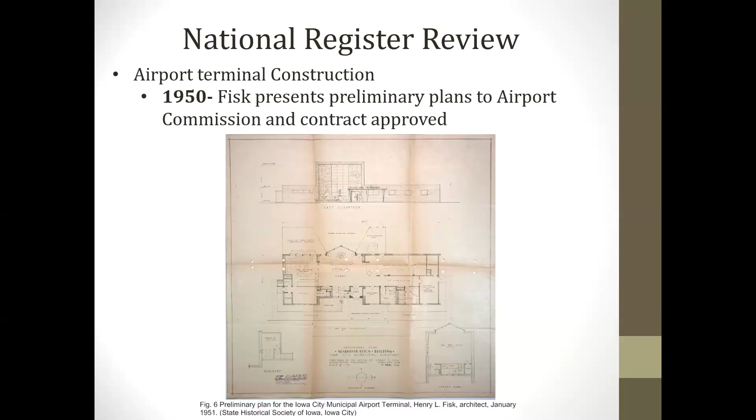I don't know that she went into the call for architects or how that all started, but in 1950, Henry Fisk submitted preliminary plans and a contract was approved.

Through some airport bonds—I can't remember who purchased them, but it was like a large company or something—and a grant from the CAA, the terminal was funded.

Then they started having a lot of delays. If you can imagine, after World War II, there were some restrictions on materials. You couldn't necessarily use all the steel you might want to use, partly because of shortages, and also because there had been shortages—they were starting to stockpile and restrict uses of materials.

So there were some delays, specifically because of the use of metals. Fisk had somewhat anticipated this and had designed the building to use a minimal amount of steel, which was good because that helped make it so that it could be approved, as it had a lower use of steel than other buildings of that size.

Some of the shortages continued along with weather delays in '52, and finally the building was completed in 1953.

Some key aspects of the terminal design were that entry canopy for loading and unloading vehicles, and the west windows over the airfield were tinted to limit the glare of the sun. The floor was radiant heated concrete originally, with air conditioning and modern asphalt tile flooring, and some modernistic light fixtures.

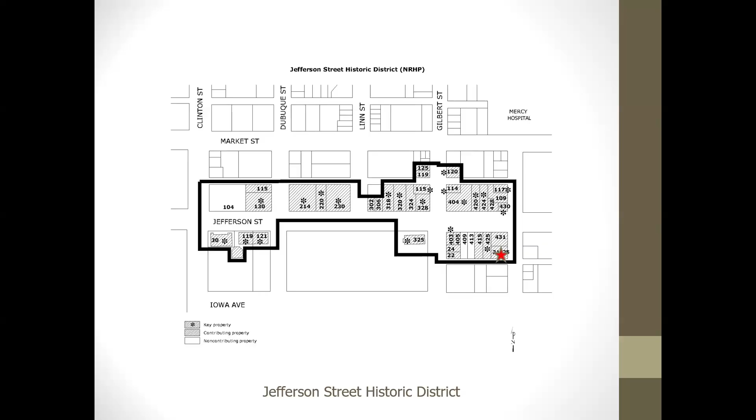The home is covered in metal siding, and this property has succumbed to significant deferred maintenance over the years. However, it was recently sold, and the new owner is looking to make substantial improvements. Recently, the staff and chair approved a repair of the northern foundation wall, which was caving in.

Today's request is to replace the metal roof with architectural asphalt shingles. The lower sloped roofs will be replaced with membrane roofing. There are internal gutters that will need to be removed due to deterioration, however the internal gutters on the front porch will be repaired. The project also includes replacement and repair of trim and trim details due to deterioration.

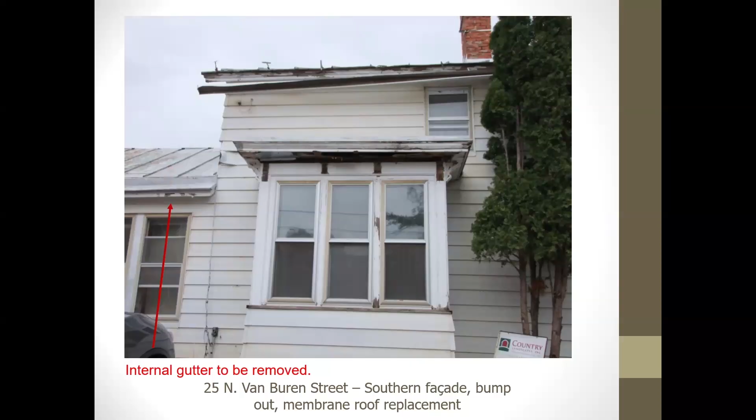This is an internal gutter that would be removed as part of the re-roofing project, and here's another photo of that kind of metal roof on the rear addition. This is the front porch. Again, the front porch internal gutters would remain.

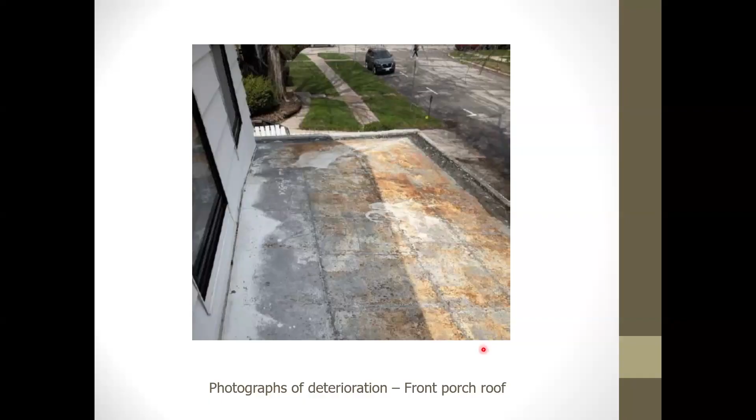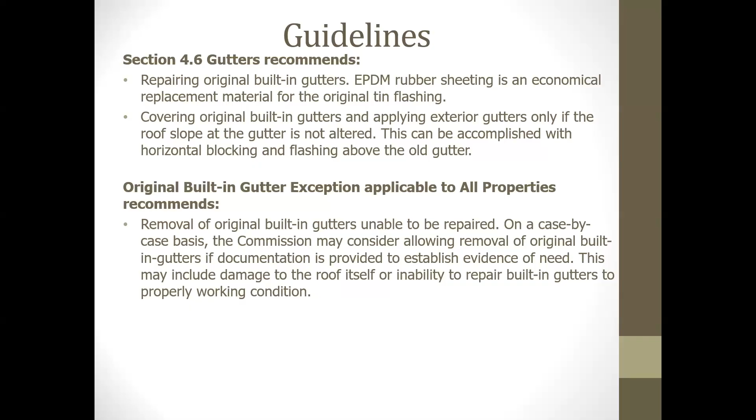In terms of the guidelines, our guidelines recommend repairing original built-in gutters, covering original built-in gutters, and applying exterior gutters only if the roof slope is not altered. Also, original built-in gutters can be removed if they are unable to be repaired, and this can be approved by the commission on a case-by-case basis.

In terms of mass and roof lines, historic trim should be preserved whenever possible. In this case, a lot of it is gone or significantly deteriorated, so it would need to be replaced. The guidelines also recommend maintaining metal roofs where possible, but with this home it's just too deteriorated to repair, so the recommendation is to replace, and again that can be done by the commission on a case-by-case basis.

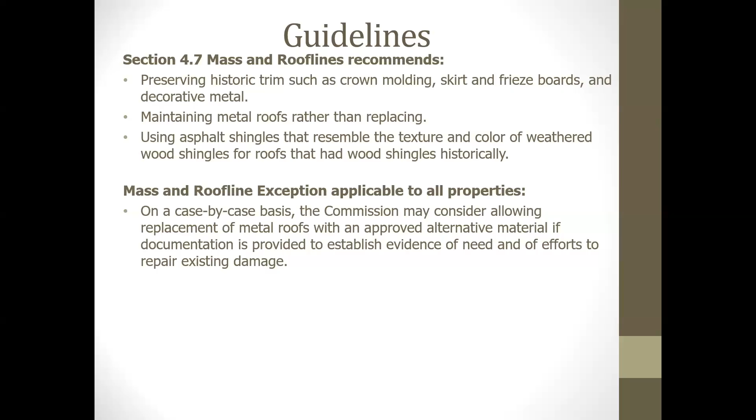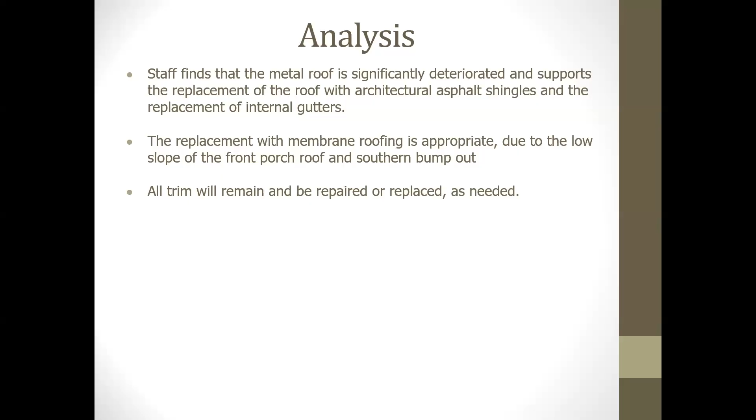Staff finds that the metal roof is significantly deteriorated and supports replacement of the roof with architectural asphalt shingles and replacement of internal gutters. The replacement of membrane roofing on those low-sloped areas is appropriate, and all the trim would be repaired, replaced, or remain as needed, matching what was there originally.

Staff recommends approval of a certificate of appropriateness for the project at 25 North Van Buren Street, allowing replacement of the deteriorated metal roof, including the internal gutters, with architectural asphalt shingles, and replacement of the metal roof on the front porch and southern bump-out with membrane roofing. Again, the internal gutters on the front porch roof would be repaired, and all trim would either be repaired or replaced as needed with wood to match the existing.

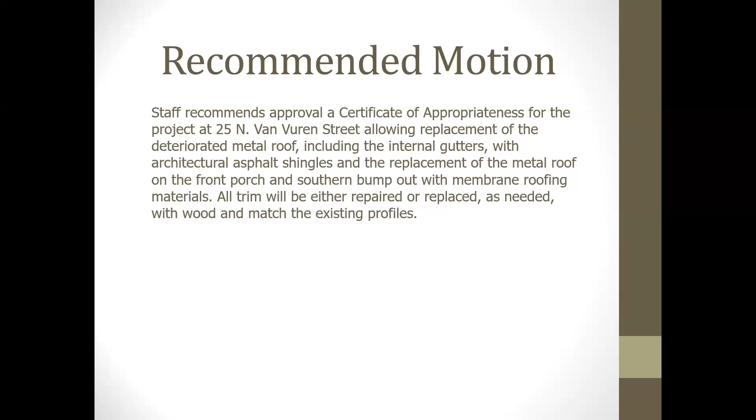That's all I have. Thank you.

Sounds good. Are there any questions for staff? Did we have somebody go out and look at the metal roofs then? Yeah, Jessica and I both did. Okay, and the architect is here as well. Do we have commentary from the owner? That's the next step, I think, right? Yeah, or the architect or anybody, if you want to comment or if we have questions for you, but you don't have to if you don't want to. You just have to come up and sign in.

I am Justin Straight, the general contractor and project manager. One note to what you said: the south bay window, the internal gutters on that will also be able to be salvaged. The curb gutter, the Yankee style, however, best referred to on the south face, is in seriously bad shape, and it's such that the way it's built and formed would require a crazy amount of work. The way the gutter actually discharges, it goes out the eave on the backside of the house, so it'd be on the west side, right above the exterior wall. Where it's placed and its current state is one of the reasons we wanted to just go ahead and get rid of it, and also due to the extensive amount of other work that's going to be done.

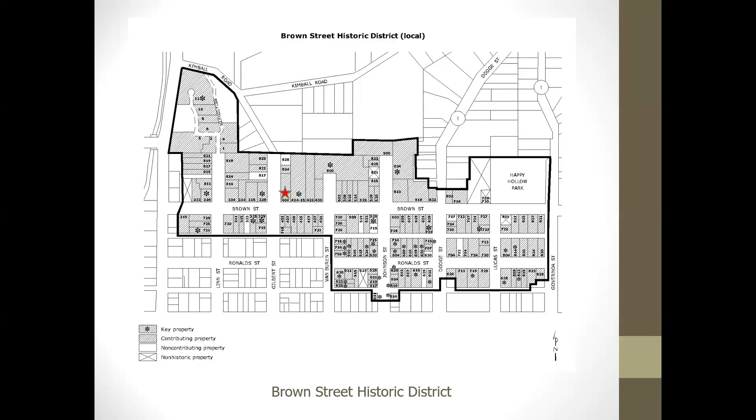This next project is for the property at 404 Brown, which is a contributing property in the Brown Street Historic District, shown here with the star on the map. This home was built in 1916. It's an American four-square. In 2018, the commission approved an attached garage for this property, however that project never moved forward—the previous owner never ended up constructing it. Today there are new owners who would also like a garage and have proposed something slightly different than what the commission approved in 2018, so it's coming back for your review.

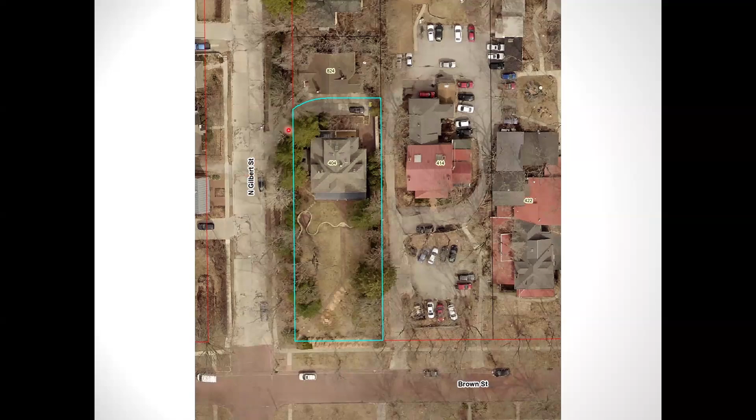Here's an aerial view of the property. You can see that the home has a substantial front setback from Brown Street, leaving very little room in the rear yard for a garage, so a detached garage for this property is difficult. The project originally approved was unusual in that access to the garage was through the neighbor's property at 414. That easement hadn't been secured at the time, but the idea was they would eventually get an access easement from the neighbor and enter the garage from the east side. The proposal now is to have an easier entrance off of North Gilbert Street.

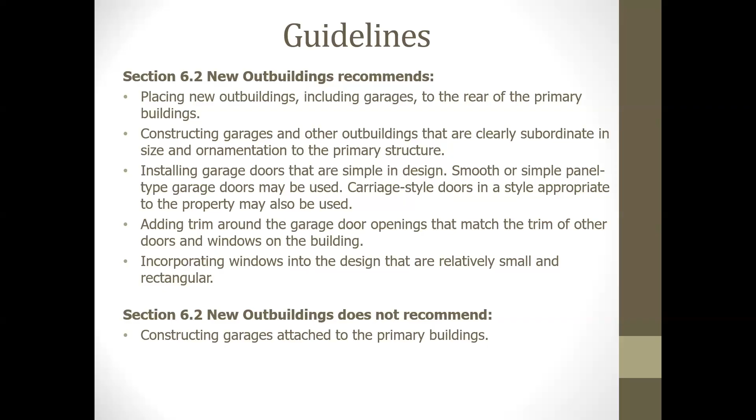The guidelines for new outbuildings recommend placing new outbuildings at the rear, constructing garages that are subordinate to the primary structure, installing garage doors that are simple in design, though carriage-style doors are also allowed and may be appropriate. They also recommend adding trim around garage door openings to match the trim of other doors and windows, and incorporating windows that are relatively small and rectangular. The guidelines do not recommend constructing garages attached to primary buildings.

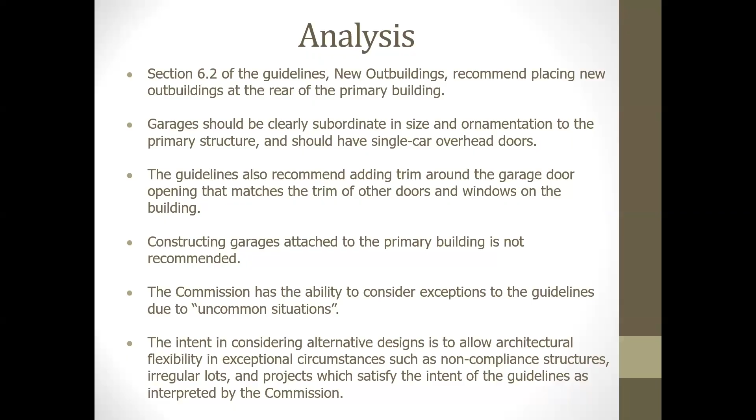In our analysis, staff finds that the majority of these guidelines are met. However, the proposal is to have an attached garage, which is not recommended by the guidelines. The commission has the ability to consider an exception to the guidelines due to uncommon situations. The intent in considering alternative designs is to allow architectural flexibility in exceptional circumstances, such as non-compliant structures, irregular lots, and projects which satisfy the intent of the guidelines as interpreted by the commission.

Staff finds that the property presents a unique condition that justifies an exception to the guidelines to allow an attached garage, mainly due to the very large front setback and not having any room in the rear to build a detached garage. The exception is warranted due to the unique configuration of the home on the lot, and the proposed addition does not significantly affect the architectural character of the historic home. Staff recommends approval of the certificate of appropriateness for the project at 404 Brown Street as presented in the staff report, through an exception to the guidelines allowing an attached garage due to the placement of the home on the lot. Are there any questions for staff?

Can you go back, not the drawing of the garage, but when you were showing... yes, this one. I'm curious because my understanding is with additions we set them in so you can't see them, but this one clearly bumps out. What's the reason? Is it just because it's a garage and you can't see it at all from the front because of such a huge setback? Why an exception for this?

They are maintaining that original corner, which we worked with them on. Bringing it completely in makes the garage almost non-functional, and because of the distance from Brown as well. All right, just curious—I think this is a great idea, not questioning it, just really curious.

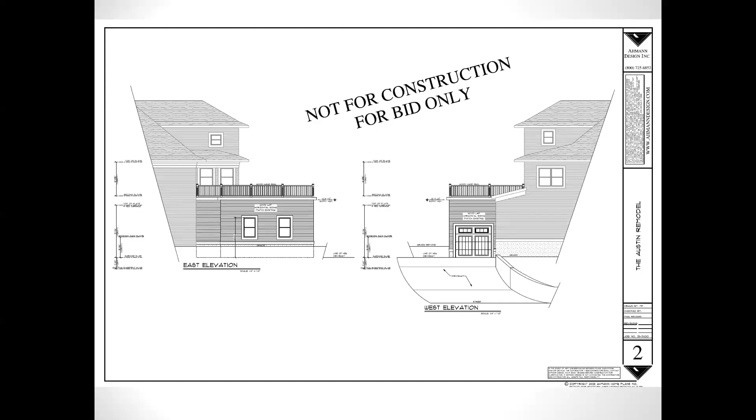Yeah, I have a question as well, this is Lewis speaking. If you go back a couple more—I don't know which one it is—this one, nope, keep going, this one. A lot of times we're worried about lines, like where windows are and where the foundation is, and these don't seem to match. I don't know if this is just the drawing or if this is a plan, or if that's something we don't care about right now.

Are you talking about this area here not matching here? Yeah. I think the topography of this site is really challenging. Sure, and I think that's part of the reason you see that difference, but it is a difference—it will be different.

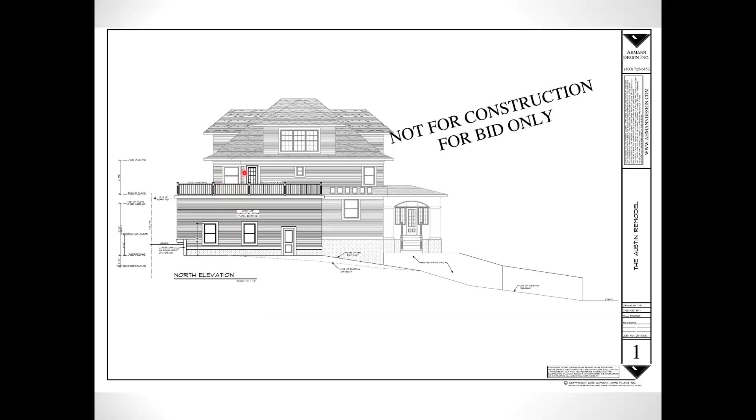For general background information, I know this house—it's beautiful. It does have that huge front yard. We would never consider putting something out in front of the house because that would take away from the dominance of the house. Is that correct? Yes, how I understand it.

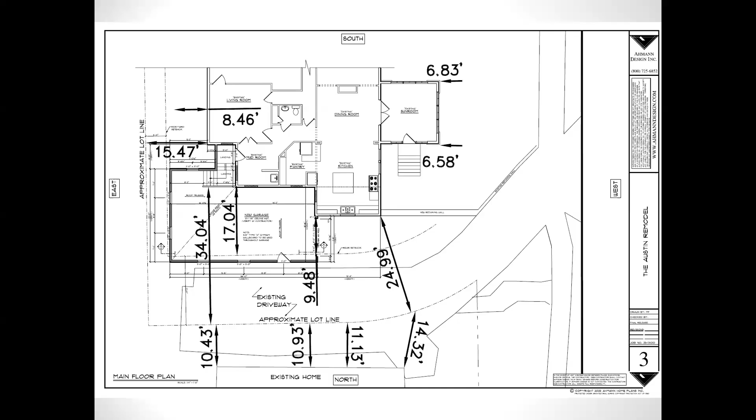Any other questions for staff? Okay, if the owners would like to speak, you don't have to, but if you'd like to, you can.

Usage, or how we're going to get a second car. Parking, we're not sure. You need to sign in. Yeah.

I'm Ned Austin, people call me Buck, and my wife Morgan and I own the house. We hope to be able to get a second car in there. We went through several different iterations of this design, and there was just not a way to get a conventional two-car garage. This is probably the closest we can come to it. We might be able to get a second car on skates, like dollies you put a car on and then store it back there for winter storage. Otherwise, maybe space for a workshop or storage. Gotcha. Okay, thank you.

Do we have a motion? Wagner moves to approve a certificate of appropriateness for the project at 404 Brown Street as presented in the staff report, through an exception to the guidelines allowing an attached garage due to the placement of the home on the lot. Villanueva seconds. Do we have any commission discussion?

I will just say in general, I don't like attached garages on old homes, but this really is an exception. I can see it, good solution. Okey doke, all in favor? Enjoy your cute garage. Aye. Aye. All opposed? Okey doke. Thank you so much.

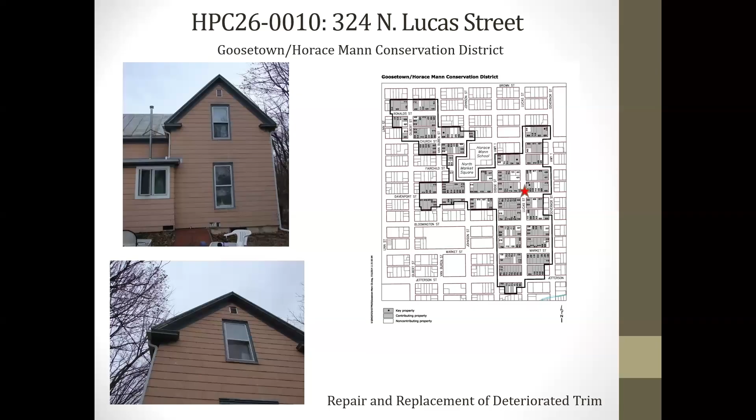25 North Van Buren, which we discussed earlier today, this is the approval for the repair and reconstruction of that failing foundation wall on the north side of the home.

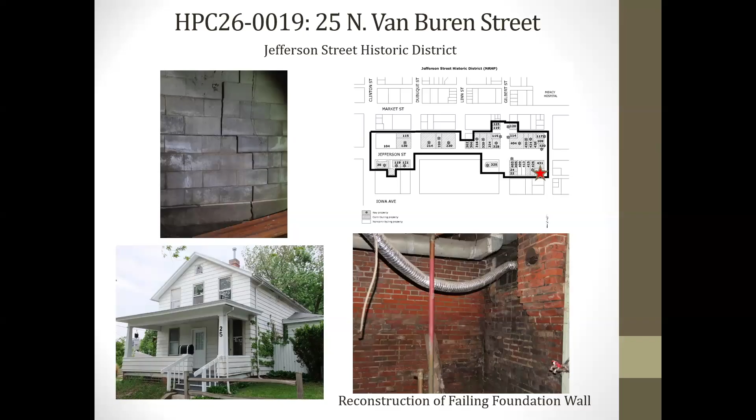This is 209 East Washington Street, which is a local historic landmark, and this approval was for some tuck pointing. 225 Fairchild Street in the North Side Historic District, this is for replacement of the plywood soffit in this area with beadboard soffit, which would be more historically appropriate than the plywood that exists now.

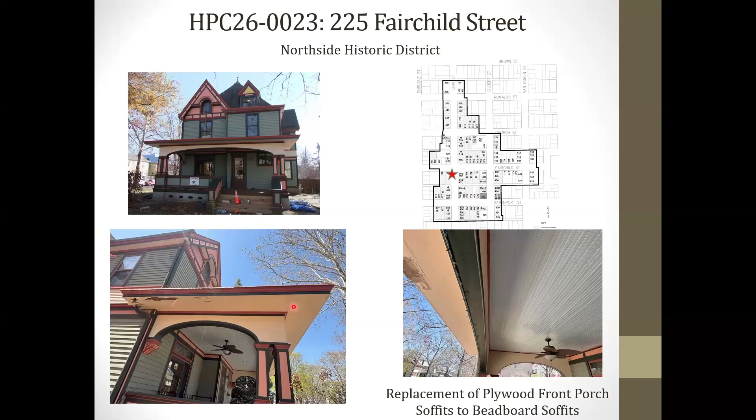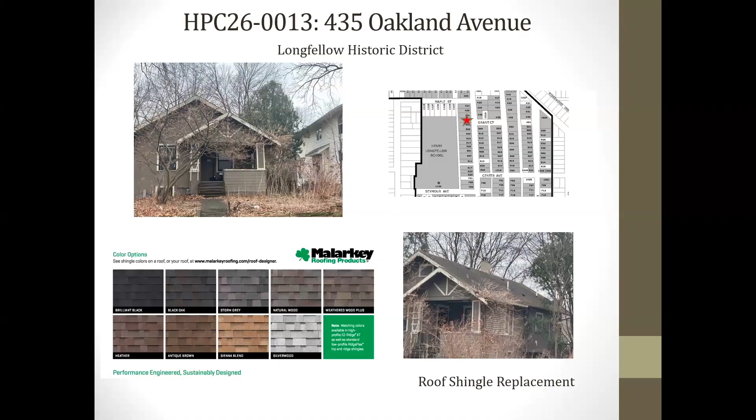Pretty hot. For the minor reviews, this is 712 Grant Street in the Longfellow Historic District. This was for the stair and handrail repair for this stoop here. At 435 Oakland Avenue, also in Longfellow, this was a roof shingle replacement. At 503 Grant Street in Longfellow, this was an approval of new garage construction.

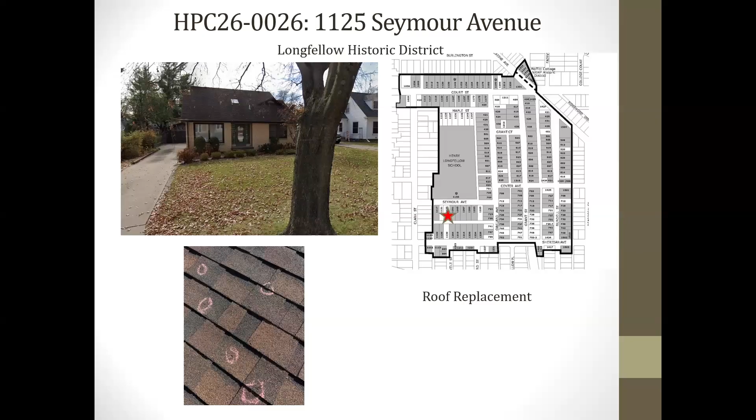At 1039 East College Street in the East College Street Historic District, this was approval for roof shingle replacement and associated repair and replacement of deteriorated trim. And then another roof replacement due to hail damage at 1125 Seymour Avenue, also in the Longfellow Historic District.

Consideration of minutes for March 12th, 2026, because we didn't get to... gotcha, okay. I was like, whoa, I don't know what to do if anybody had any changes. No. So then just make a motion and vote.

Wagner moves to approve the minutes for March 12, 2026. Beck seconds. All in favor? Aye. Aye. All opposed? Okey doke.

Moving on to the consideration of minutes for April 9th, 2026. I have nothing. Thoman moves to approve the minutes for the April 9th, 2026 meeting. Villanueva seconds. All in favor? Aye. Aye. All opposed? Okey doke.

Moving on to commission information. I don't have any. Sweet, specifically. Okay, I guess just to mention, Jessica is doing a presentation on Monday for the Iowa Association of Realtors, talking about our historic districts and conservation districts and what it means if you're selling a property in one of these districts. So this kind of education is really important.

That is great, yeah. Oh, they're building out in Coralville, next to Vesta on the Iowa River Landing. Oh, yeah, we can all go. It's a lunch and learn, I think, free lunch. Not for me, but... Less than quorum can go, right?

That's the idea. Oh, and the Preserve Iowa Summit is June 2nd and 3rd. I'll be going. It's just in Ankeny at the FFA building. It's kind of a down version of normal. I don't know why, with everything going on, they did not have a community apply to be the host, so I think the SHPO's just putting it on. But anyway, you can register and go if you want. They're not having the same kind of roundtable discussion and stuff that they normally did.